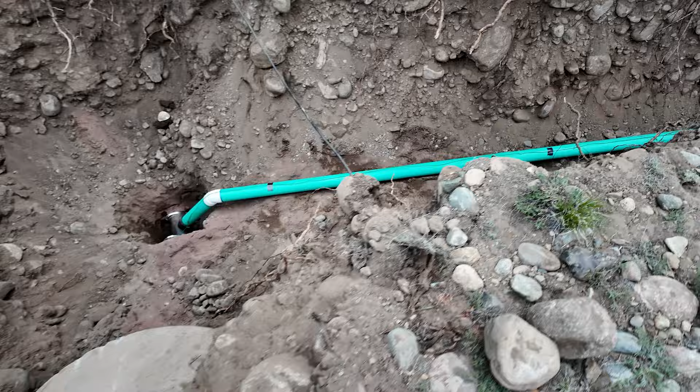Up here on top of the hill where this house site is, I put the corner post in and did some flagging and string lines coming down here to mark out the perimeter of the house. I didn't film that part because it's just me walking around, but I'll go to my plans and show you how I did the layout and transferred it from the plans out here to the ground, a real easy method I used.

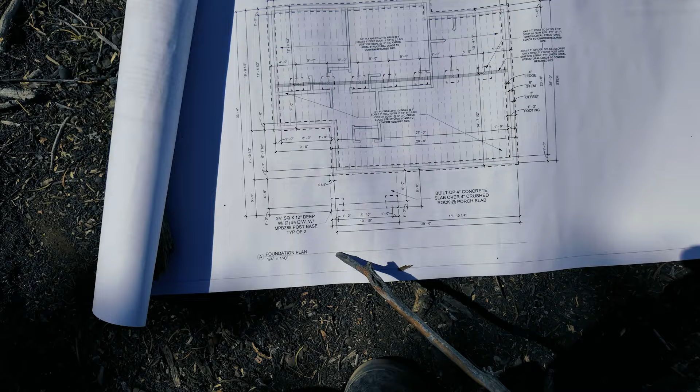House site in front of us. Come down here to the plans. We were standing basically about right here. My plans here are pretty much just two big squares.

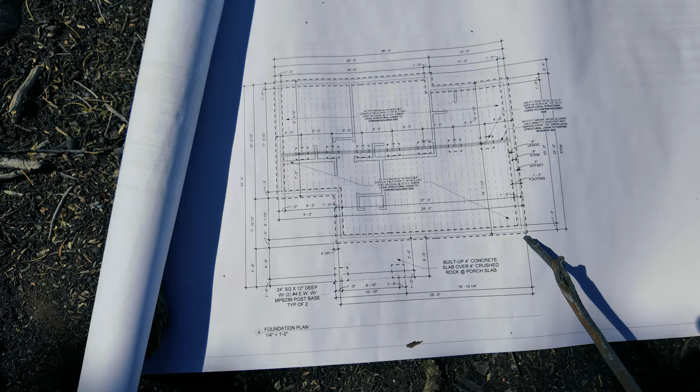I put a post in there, marked one there, then came over here and marked one, making a big square. Then I put the string line across these four and squared up this foundation, so I had one big square there. I went back along to this one, taking my measurements off of here, and made the second square that's in there. That's a pretty easy one to do.

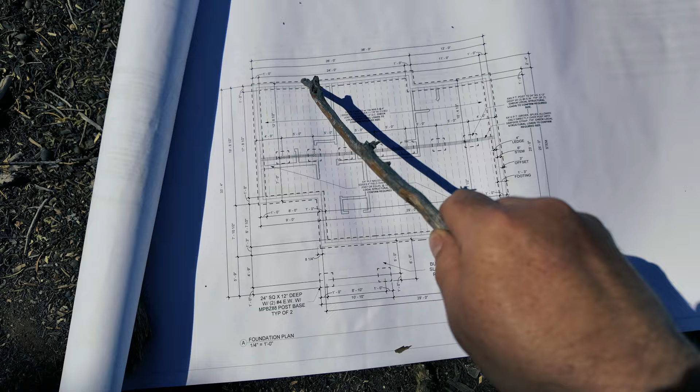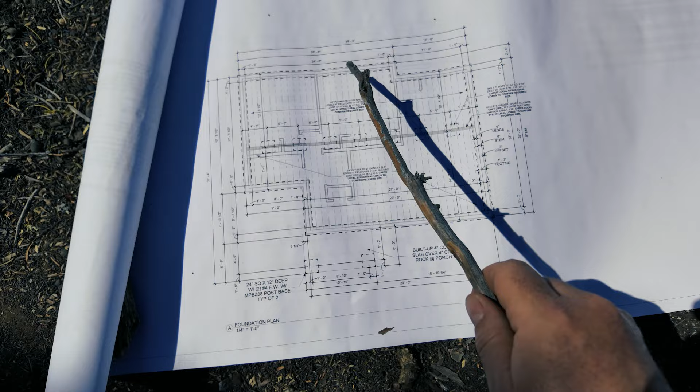I know my measurements from here down the wall there, and I can make sure that this wall is going to be parallel to this line I have here, and this line here parallel to this line there. I know these two walls here are going to be parallel and square with my other square, and that one is square already. To that one, it's easy - I just went corner to corner and made sure those are perfectly the same.

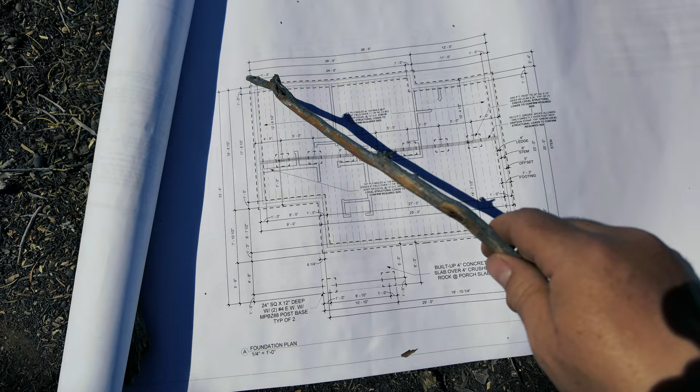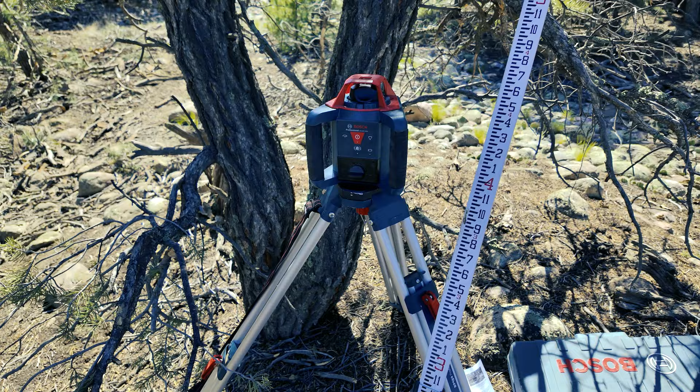Everything is all square, and I put my string line across there, put some flags along there, and double checked my measurements. Everything is where it should be. Now I'll go back with some paint and paint the edges there. Since this is just the outline of the stem wall, I also have to go back about 2 feet and over excavate 2 feet along the edges there. So go to the foundation, get some paint out, and then get the machine out here and start digging.

Now that I have the outline of my dig area done, I got the grade level set up, and I put the bottom of the stick right here. This is what I want my top of grade to be, because this is where the front entryway is. So I got my grade level already, and that was about 3'9" when that was level with this receiver here.

I need to go down 40 inches, so I just raised the receiver, brought it up the pole there 40 inches. That way, once I'm digging, I can put that grade stick in the hole, and it'll beep when it's level. You'll see me do that a bunch of times. Pretty much here is 40 inches high, and that bottom corner there is about 40 inches low. So everything from here I'm going to try to bring down to that back corner, and I'll use that later for backfill, just to raise that corner up a little bit. But that's the plan for now, off to digging.

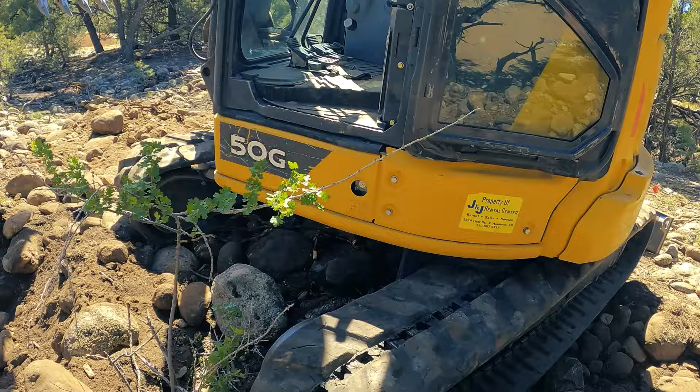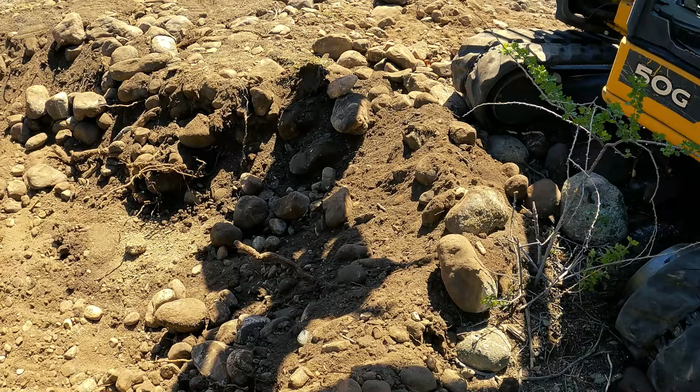But I have to take a little break because it's time for the daily routine of putting the track back on. You can't see it there, but again, it fell off - like the third time it's fallen off since I've had the machine. Seems like every day it falls off, but that's just how it is.

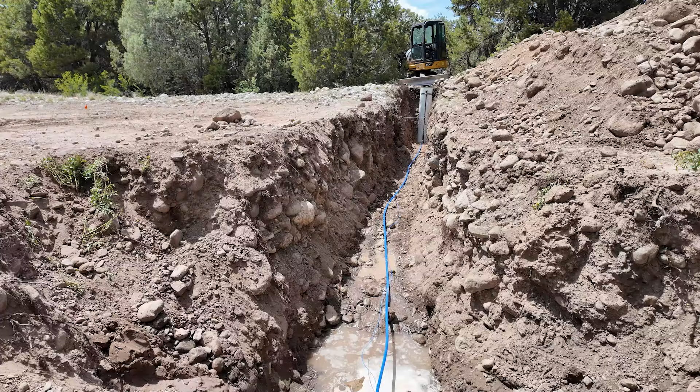So it's been about half a day here. As you saw before, we were down there digging up that water main under there. You see a bunch of water - I thought maybe it was a leak in the water main, but turns out it's just a lot of creek water, kind of like groundwater infiltrating in, because it's really a lot of rocks here. So that's all good there.

We went ahead and the water department got the pipe connected to the water main and out there to the meter pit, so that is done there. Now this is all connected so we can get some sand on top of our water main and the water line, and then I go ahead and get this dirt backfilled and get the road back open.

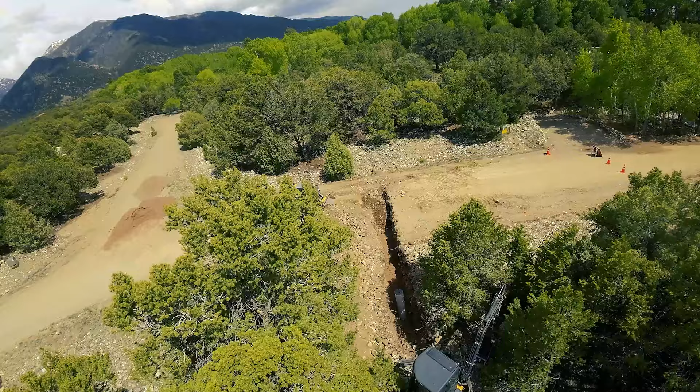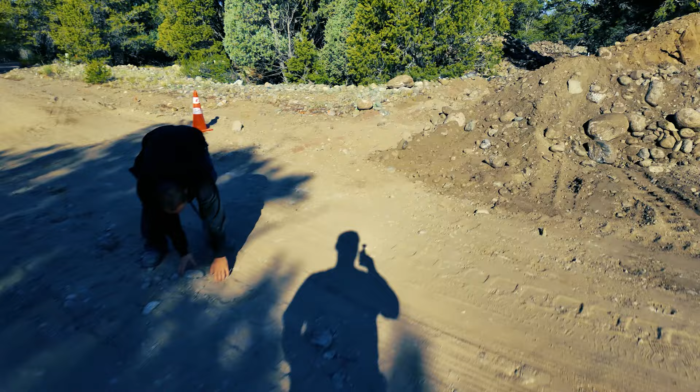So next day here, we went ahead and got the road all filled up. We'll be coming back with some road base to get it smoothed up, taking some of the rocks out so it's easy to drive on.

Walking up here where the meter pit is put in. We'll get the meter pit backfilled, and we started down into the trench, getting that backfilled too. Got some nice sand in there, and our water line put all the way down there. First thing today, we won't have time yet to fill this in. We'll be going up to the sewer line to get that dug up and put in, and later on, maybe today or tomorrow, we'll go ahead and do the backfilling on this one.

Back here at the street, this is the manhole, and the sewer goes up the street, then coming down here, and that post is where the sewer is going to be tied into. I'm going to get set up here and start excavating this part down to the sewer. Once we find the sewer line, I'll dig the line back there and sneak it in between the trees to the house site. Once I get over to the trees, I'll do a little video showing where the sewer line is going. But I think the machines are warmed up, so it's time to get to work.

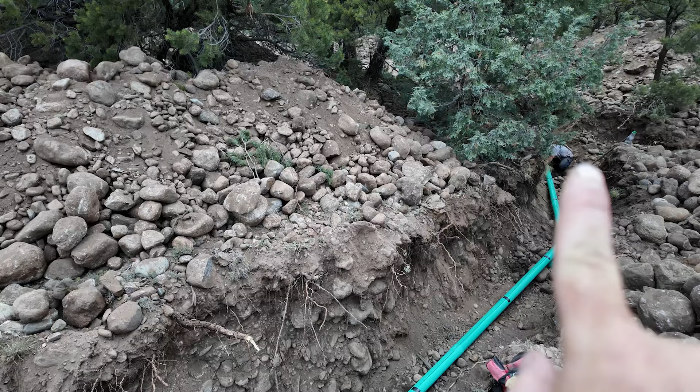Alright, it's almost the end of the day here, but this morning you saw we started getting ready on the sewer pipe and got the trench excavated and connected to the sewer. The sewer main is that one down there. We came up and over, showed along the edge of the pipe here. Now we got this dug out right here, and like I said, around that corner and through the trees to the house. We put our tracer wire on top there - I don't know if you can see it on camera, but it's a little green wire so we can find it later if we need to.

But for now, there's lots of rocks in here, so it's time to backfill. I'm going to go get some bedding sand and put that on top of the pipe here. We can get a little bit underneath it, about 6 inches on top, and then start putting some of this nasty stone back on top of it, and we won't have to worry about damaging the pipe.

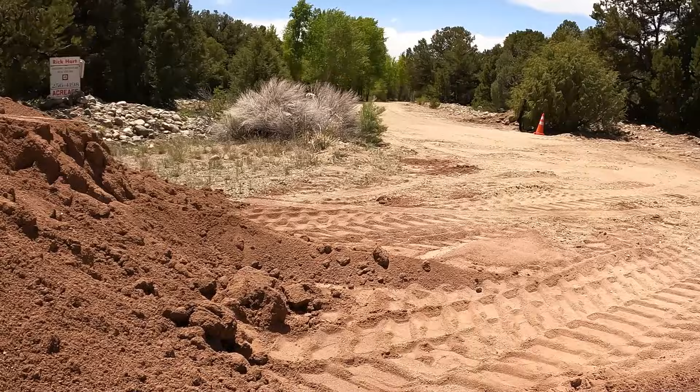Alright, so as you saw, we've been backfilling these lines, and this is the stuff we're using - it's just crusher fines, screened dirt, but it's really good for putting on top of the pipes and power line to make sure the rocks aren't going to damage anything. We have a little bit left here. As you saw, we just worked on getting the sewer line backfilled, and now we can go right behind where the tree is and get back to backfilling the water line.